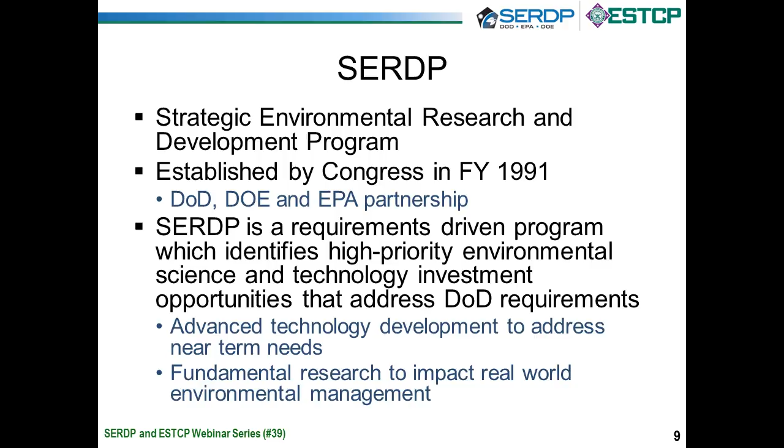Thank you, Mike. I'm very pleased to welcome everyone to today's SERDP and ESTCP webinar. SERDP is the Strategic Environmental Research and Development Program and was established in 1991 by Congress as a partnership between DoD, the Department of Energy, and EPA. SERDP's mission is to identify and address high-priority environmental science and technology opportunities that focus on DoD requirements. SERDP funds both fundamental research as well as advanced technology development that ultimately impacts real-world environmental management.

ESTCP, the Environmental Security Technology Certification Program, was established to demonstrate innovative environmental and energy technologies. These investments capitalize on past investments under SERDP or other research programs and are designed to transition technologies out of the laboratory and into the field. Especially important in all ESTCP demonstrations is the ultimate transition to implementation and regulatory acceptance.

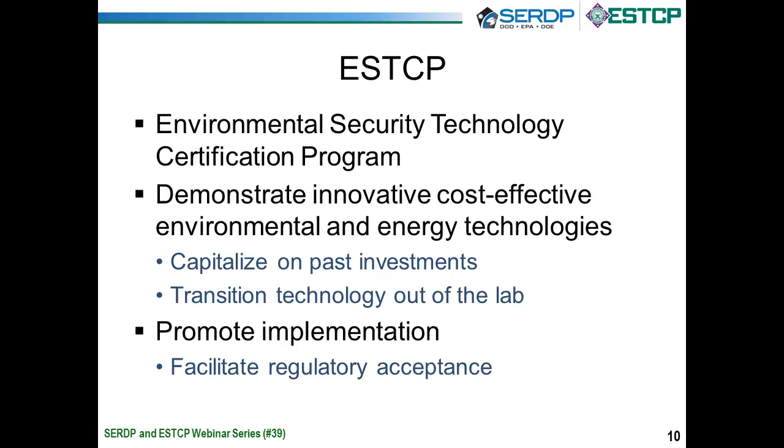SERDP and ESTCP are complementary programs. Much of the SERDP effort occurs at the laboratory and pilot scale, but with occasional field efforts. ESTCP, on the other hand, consists of demonstrations that are primarily at the pilot and field scale, although occasionally there are supporting laboratory efforts that are conducted.

We have 4 program areas in SERDP and 5 program areas in ESTCP. Energy and water is an ESTCP-only program area, while the other 4 - environmental restoration, munitions response, resource conservation and climate change, and weapon systems and platforms - cover both SERDP and ESTCP, and are managed jointly by one designated program manager in each of those 4 program areas.

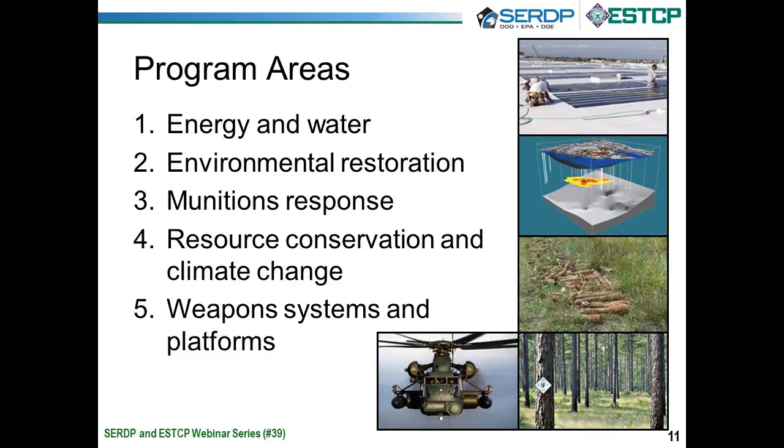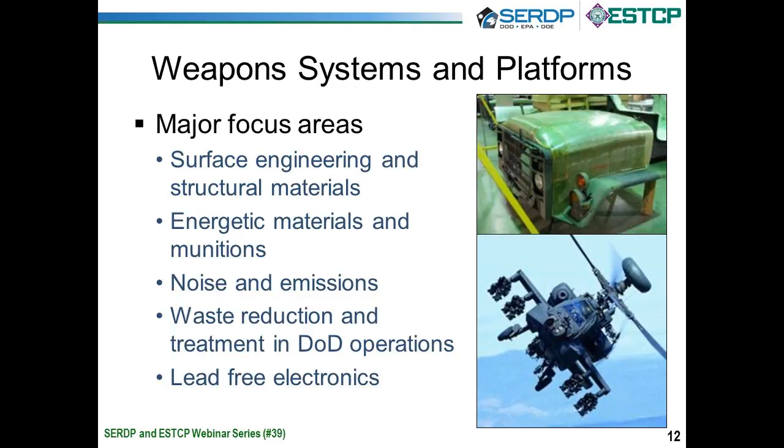Today's webinar is focusing on research and demonstrations that were conducted under the Weapon Systems and Platforms program area. This program area has 5 major focus areas: surface engineering and structural materials, energetic materials and munitions, noise and emissions, waste reduction and treatment in DoD operations, and lead-free electronics. Today's topic is going to cover a little bit of energetic materials and munitions, as well as emissions.

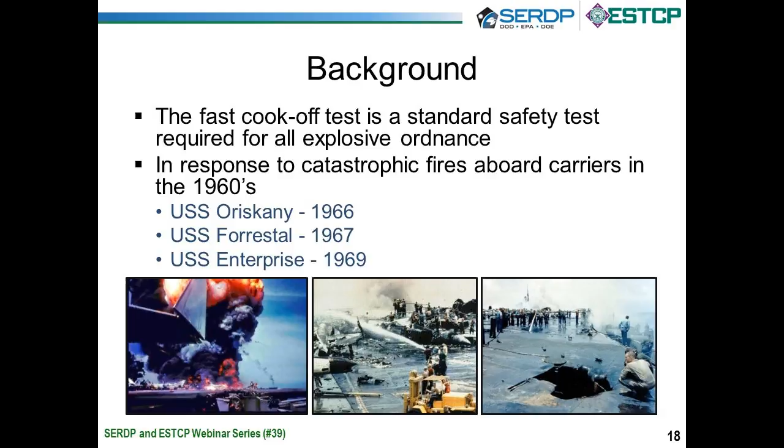The images at the bottom show some of the results from these fires. Notably, the USS Forrestal in 1967 had an incident where 134 U.S. sailors were killed. What happened was you have a bunch of planes getting ready to fly their sorties, loading with explosives, and any fire that starts on the deck results in a bunch of bombs immersed in a large fire. Once one of them cooks off, it's a chain reaction that's hard to stop.

In response to this, the DoD initiated fast cook-off testing, and the purpose is to gradually improve the IM response, the insensitive munition response, to these items, to make them less sensitive to external heating. You want to work towards a situation where the item does not explode at all—it simply burns or does nothing when subjected to these kinds of incidents.

To perform the test, the test item is immersed in a large flame produced by burning liquid hydrocarbon. As shown in the bottom left picture, we have a 105 millimeter howitzer round on a test stand sitting in the fuel basin here at Dahlgren. Once the item's in the basin, the next step is to pump in the fuel required to produce the fire, typically either jet fuel or kerosene.

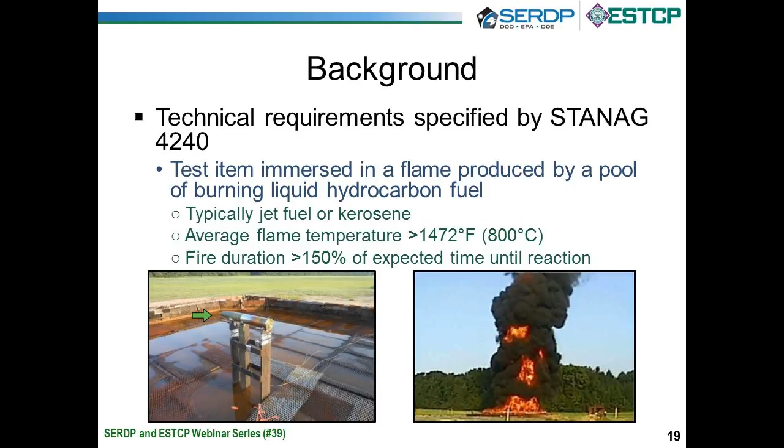You have to pump in enough fuel to produce a fire that burns 150%, or 50% longer, than the expected reaction time. So you have to estimate up front how long you think it'll be before the item reacts, then pump in extra fuel because you don't want to be too short. The other requirement from STANAG 4240 is that the flame temperature measured around the item has to be greater than 800 degrees Celsius for the average duration of the test.

There's been a steady and constant push for an alternative fuel that stems from some of the issues with the current test method. First and foremost are the environmental concerns that stem from this test. Lots of atmospheric emissions are emitted from burning these large pools of hydrocarbon in a very inefficient way.

You also have the public relations problem of the large black clouds of smoke emanating from the test site that really worries people in the vicinity. It's a very visual indication of how bad the test is. And then the very real risk of soil contamination from either spilled or splashed liquid fuel out onto the ground that's then absorbed.

There's also a number of safety and technical risks involved with the test. The fuel is typically transferred to the basin after the energetic item is in place. So now you have workers around this bomb and fuel present all while they're out there.

Another problem is the amount of time it takes to transfer that fuel can be on the order of an hour, and these tests are very weather sensitive. You can't perform them if there's too much wind. So you have to estimate what the wind's going to be an hour from now, and that can cause problems, because once you've started transferring that fuel, you've basically committed to doing a test. So if the wind picks up, you're at risk of having to repeat that test.

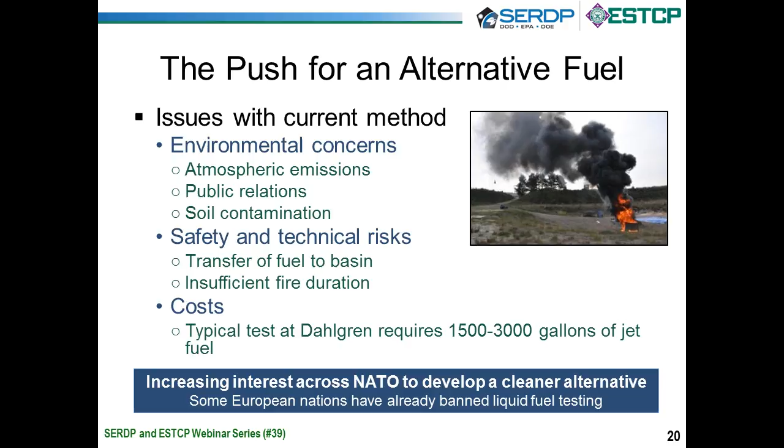Early on in this project, it was noted that propane offered a number of benefits that could address a number of these problems. Starting with the environmental concerns, propane burns much more cleanly than jet fuel or kerosene, so you have much less atmospheric emissions during the test, and virtually no soot cloud. The propane burns very completely, and you can't hardly even tell that there's any smoke emanating from the fire at all. There's also almost no chance of soil contamination because of propane's boiling point of about minus 40 Celsius at atmospheric pressure. Any spilled propane basically just evaporates and wafts away.

From a safety and technical standpoint, one nice thing is you're flowing the fuel through piping to the burner site, so there's never a situation where there's ordnance and fuel at the site at the same time. There's no fuel at the test site until all personnel are in shelter.

Also, the fire duration is only limited by the size of your fuel tank, so in theory you could burn almost indefinitely with a large enough tank. And the other side of that is you can turn the fuel off as soon as your item reacts. So you don't really have to estimate how long the reaction takes, and you save all that fuel. If there's an obvious reaction, you just shut the fire off.

There's no liquid fuel for your components to fall into, and the delay between the go decision and test initiation is virtually eliminated, because as soon as the test engineer says he wants to test, the fire can be ignited. There's also a significant cost savings. Dr. Washburn will go into some of the details, but we typically use about 1/10 as much fuel for a given test compared to the liquid fuel.

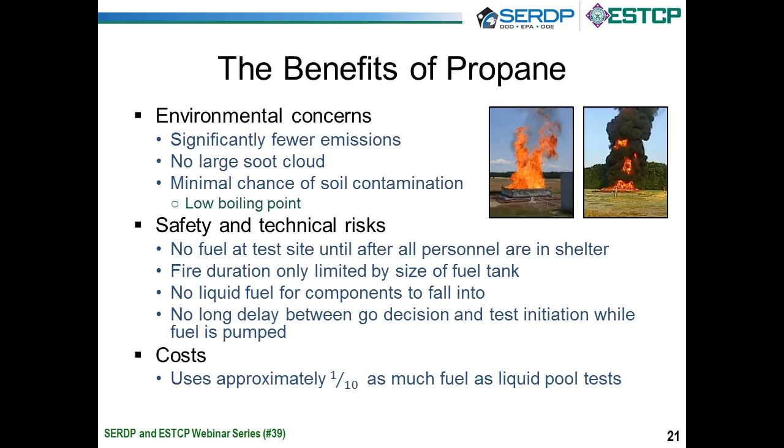So when we started designing a propane burner, there were a number of thermal constraints imparted by the testing standards that we had to meet, and these were condensed down into the following four requirements. The flame temperature must still be greater than 800 degrees Celsius. The average heat flux to the item must be greater than 80 kilowatts per meter squared. The heating should be uniform, and the heating should be approximately 90% radiative. All of these stem from trying to duplicate the heating of a liquid pool fire, which is what the item is most likely to experience during some kind of incident.

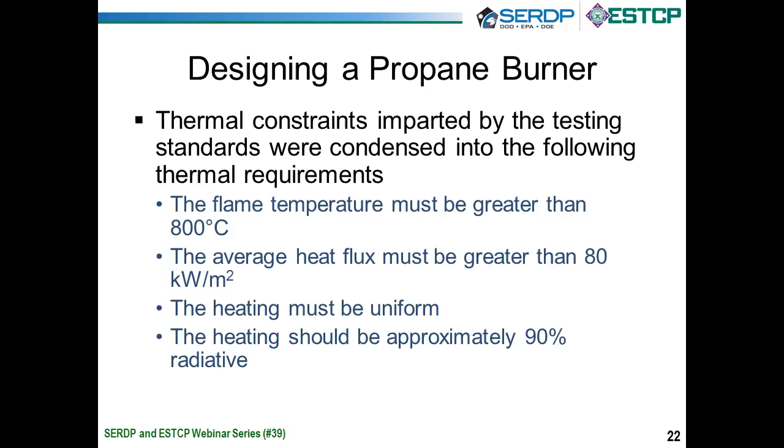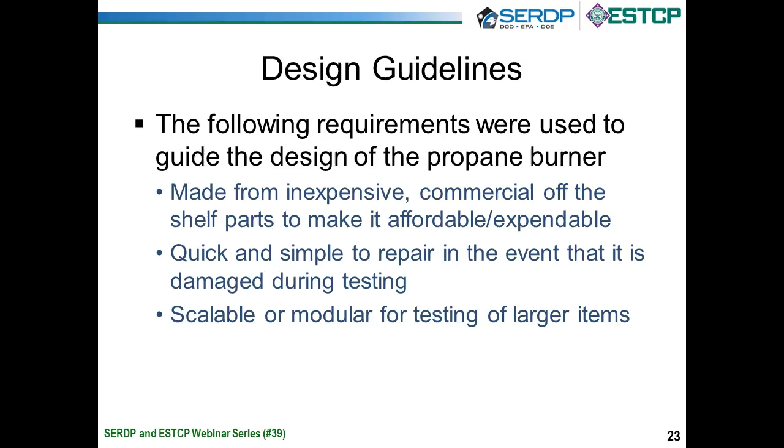Additional guidelines we impose to increase the logistical usefulness of a burner are that it be made from inexpensive, commercially available parts to make it affordable and expendable. If you test long enough, sooner or later you're going to have a high-order reaction that completely destroys your burner, and you don't want to be out a whole lot of money. It should be quick and simple to repair in the event that it's damaged, since some reactions will damage the burner. And it should be scalable or modular for testing large or odd-shaped items.

This slide shows an overview of the burner that we developed. As shown in the right-hand picture, we have a square burner box that's 12 feet on a side, 3.6 meters. Inside of this we have 26 burner tubes, and each burner tube has 26 gas ports in it, for a total of 676 gas ports that evenly distribute the propane gas within this burner.

We also have these side shields. There's only one shown in the picture so that you can see inside of the burner, but typically there'd be a side shield on each side, and these serve to eliminate or reduce the amount of air that is able to get into the burner, which helps us produce the fuel-rich fire like what you see in a liquid pool fire, to more accurately represent the same heating of a liquid pool fire.

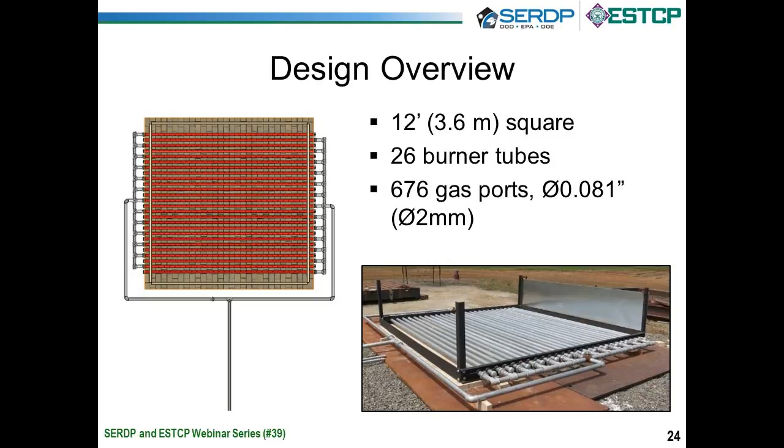Some more details of the burner design. The burner tubes themselves are simply 2-inch Schedule 40 galvanized steel pipe, but we actually flow liquid propane to the burner, and then the radiative feedback from the flame is what boils the propane in the tube. So we have gaseous propane emitting into the burner volume, which burns.

Using liquid propane was sort of key. It has much higher density than gaseous propane, so it was much easier to get the fuel flow rate needed to produce the size and intensity of flames that we required. Also, since we're flowing liquid propane out of the tank, we don't have to worry about a pressure drop. The phase change is occurring within the burner itself instead of within the tank, so we don't have the problem of tanks frosting up and the pressure dropping as they cool down. Essentially what we've done is combined a fuel vaporizer and a burner into one simple unit.

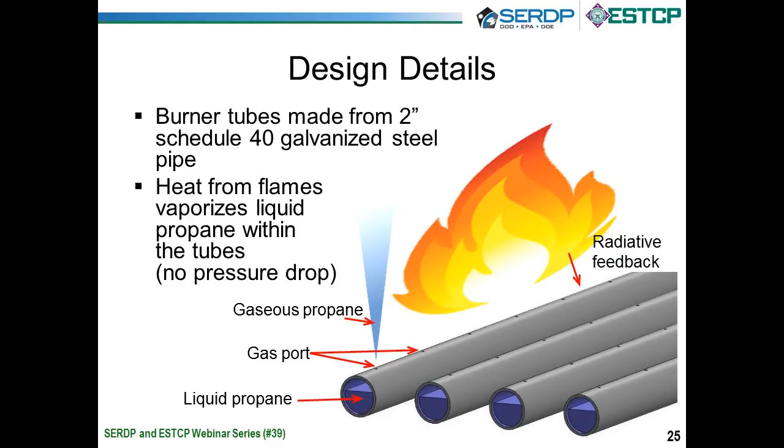Once we had the burner, we had to do a very thorough thermal characterization to determine if it met those thermal requirements that we imposed, or that were imposed by the test standards. First, we had to determine where the temperature requirement within this burner volume is met, and to do that we used an array of thermocouples. I'll show details of that in upcoming slides. We also had to see what volume met the heat flux requirement, since simply meeting the temperature requirement does not necessarily mean that it also meets the heat flux requirement.

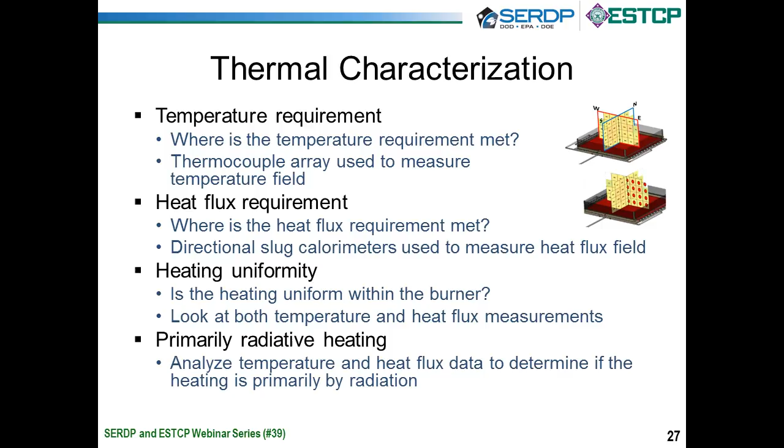The testing overview of the temperatures: we used a cross 8 feet wide, 6 feet tall, placed within the burner, just to determine the region within the burner that meets that 800 degrees Celsius requirement. In the bottom right corner, you can see this cross instrumented with 48 thermocouples placed within the burner. Again, the side shields are missing from this picture so that you can see the grid better, but during the testing, they were present.

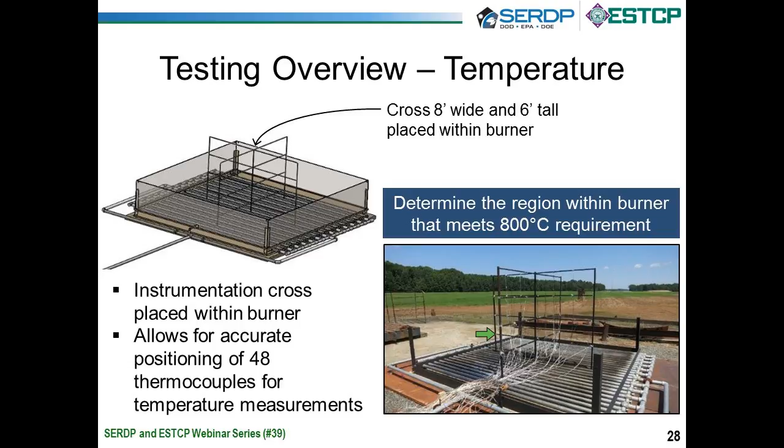Additionally, we looked at the coefficient of variation of the temperatures, which is simply the standard deviation of the temperature field divided by the mean, and this is an indication of uniformity. Our target for that was less than 10%. We got a value of 8%. So what this really means is the temperature is uniform throughout the volume. We don't have some hot spots and cold spots, but it's all more or less the same temperature.

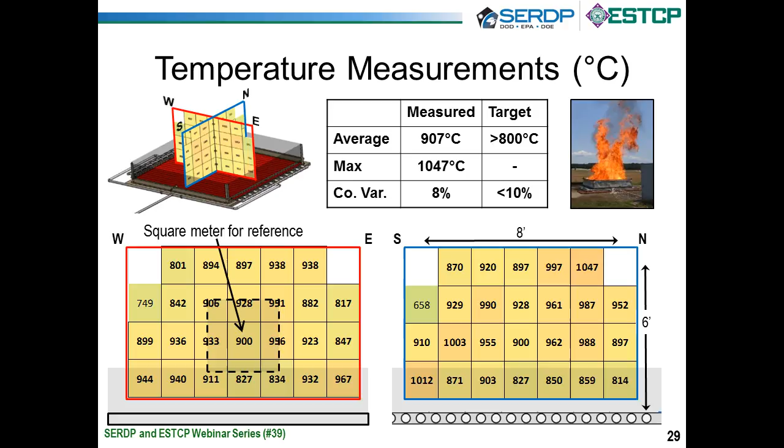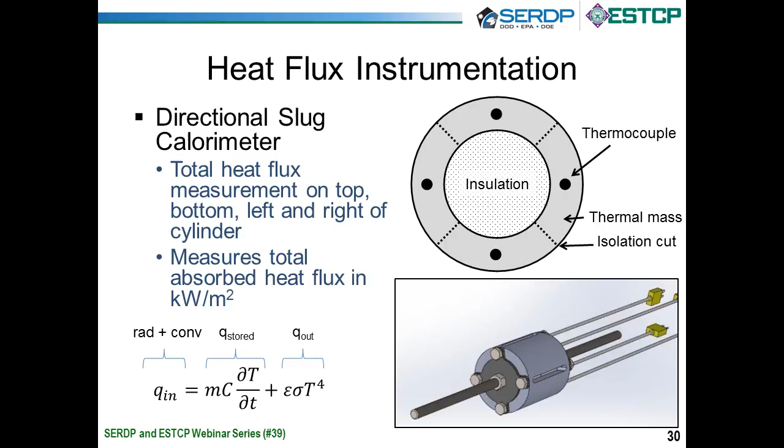Heat flux is a little more difficult than temperature because it's not a thermodynamic property of the material, but rather an energy flux through an area. So to measure that, we had to use a heat flux sensor. We used what we call a directional slug calorimeter, essentially a thick-walled stainless steel hollow cylinder divided into 4 quadrants. By measuring the temperature of those 4 quadrants, we're able to determine the heat flux into each one. This gives us the total heat flux, in units of kilowatts per meter squared, at each location.

Additionally, one other thing we look at is the directional uniformity, which again is the coefficient of variation of those 4 original measurements, the standard deviation divided by the mean. That gives us an idea of how uniform the heating is coming in at this location. A high value implies that all the heating directions are very similar, and a low value would imply that, say, the bottom is getting much more heating than the top, for instance. We wanted a value of at least 75% to show we had good uniformity.

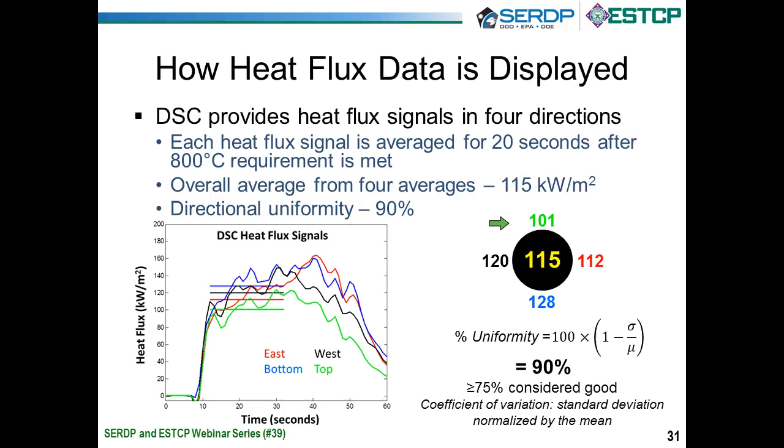The directional slug calorimeters were much more expensive than simple thermocouples, so we couldn't instrument a full volume like we did with the temperature measurements. Instead, we built a stand that held 4 directional slug calorimeters at once, and then moved it around the burner to do multiple tests.

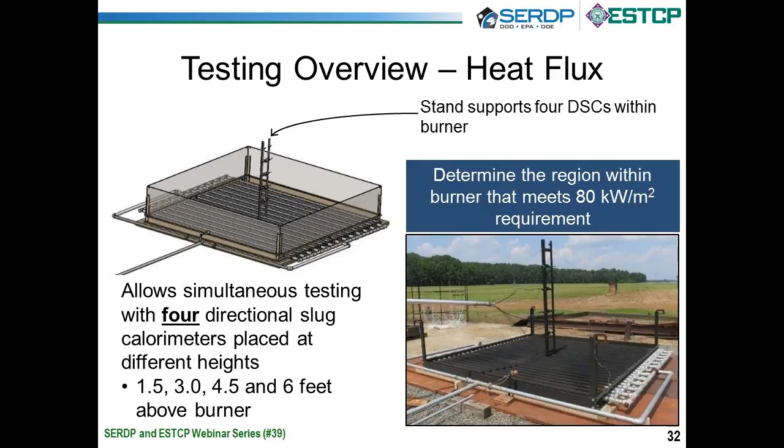We would basically do one rake at a time, and the goal is to determine the region within the burner that meets the 80 kilowatts per meter squared requirement. The heights of the 4 gauges were the same as the thermocouples, so we measured the heat flux at all the same locations that we measured the temperature.

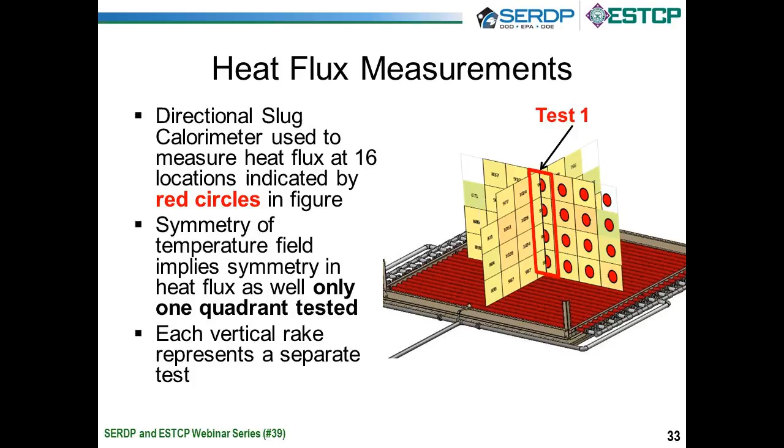Also, the large values of the heat flux relative to the velocity of the gas within the flame imply a high percentage of radiation, because there just isn't enough gas velocity to produce very much convection. So we have pretty high heat flux values. While we can't quantify the percentage, we know that the majority of the heat flux is from radiation in our burner.

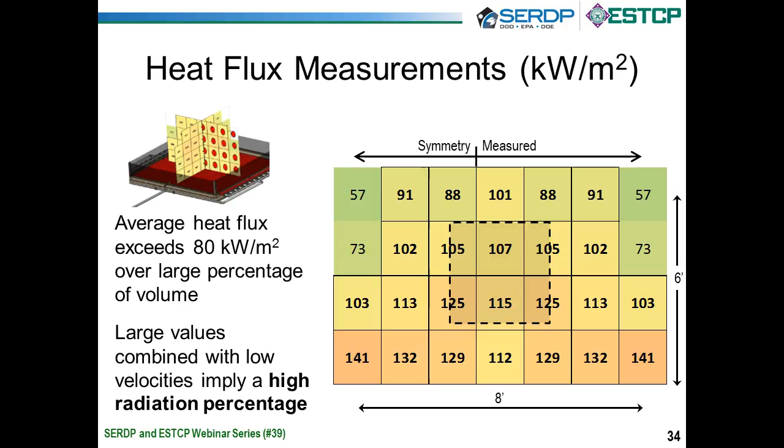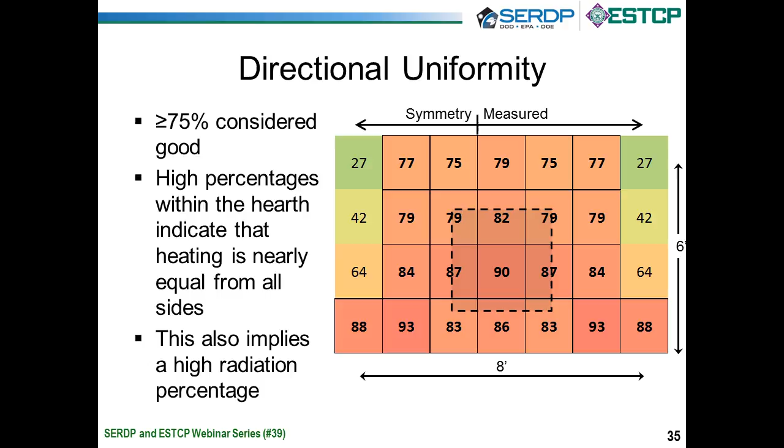This also helps us show that we have a high percentage of radiation, because if it was primarily convective, if we had torches on the bottom, we would expect most of the heating to be on the bottom of the gauge and less heating on the sides and top. So we can't really quantify the percentage of radiation, but we can say we have a majority of heating by radiation.

So a summary of the thermal testing: we have designed a propane burner that meets our thermal requirements. We've shown that we have a large volume greater than 800 degrees Celsius, and a large volume with heat flux greater than 80 kilowatts per meter squared. Most of the region within the burner has uniform heating, both from a heat flux directional uniformity standpoint and a temperature uniformity standpoint. And we think that the majority of the heating does come from radiation.

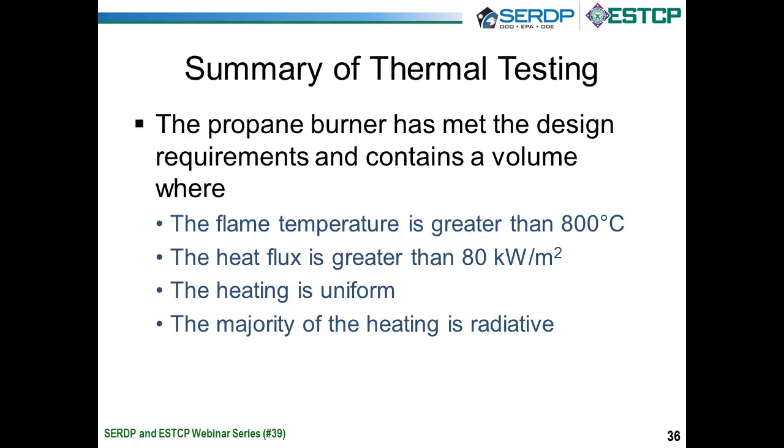So with that, we will start our first Q&A session.

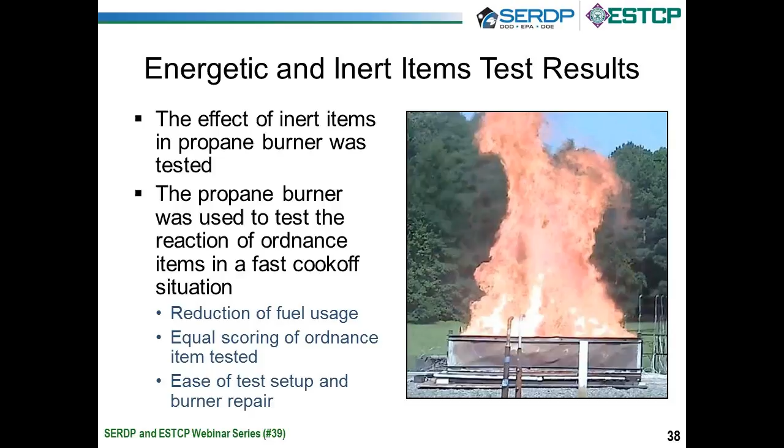We also wanted to do some examples to make sure our assumption is correct, and that's what I'm going to report on here. Once we quantified the burner—the heat temperature, the heat fluxes—we were ready to put some items there and see what happened, comparing them with pool fire. We also did some tests with inert items, just to see what would happen when a large inert item was there.

First is a large aluminum container—500 pounds of aluminum used to house a large munition. It's over 7 feet long, almost 3 feet high, and was the largest thing we've ever tested in a 12-foot by 12-foot burner. Some of what we wanted to see is what would happen if we put something that large in a burner—how would it affect the flame? And also, knowing that the aluminum should melt, what's going to happen when we have large inert items flowing over the pipes and maybe preventing the burner from working?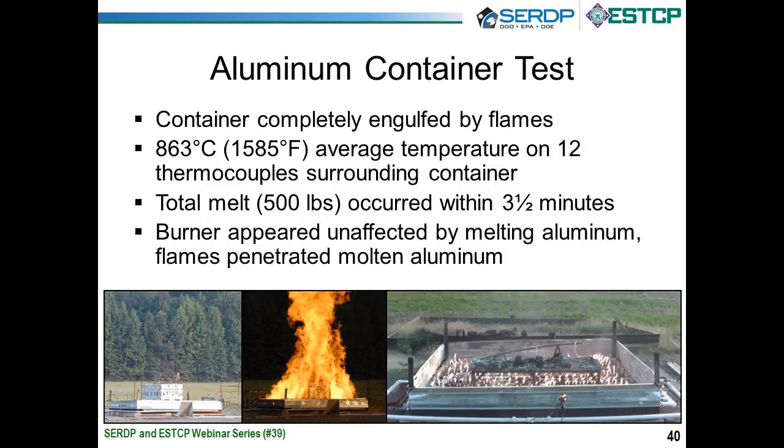We don't have a picture here, but you can see the item in that center picture before it melted, soon after it melted, and the flames went on just fine. Even after it melted, when our little candles came out of the pipes, they were able to penetrate the molten aluminum. We also put sand on the bottom of the burner, which led to pretty quick cleanup and we could use it right away.

Moving on to actual munitions, ordnance items, we started with some 81 millimeter mortars. We found a mortar that had two explosive fills. The first one I'm going to report on is the insensitive fill. It had IMX 104, which was specifically made to have a low reaction for fast cook-off testing.

They rate how an item reacts on a scale from 1, which would be a detonation, a catastrophic event, to a 5, where it will burn but stays where it's at, sending nothing outside the pool or burner itself. This IMX 104 is slated to have a Type 5 reaction.

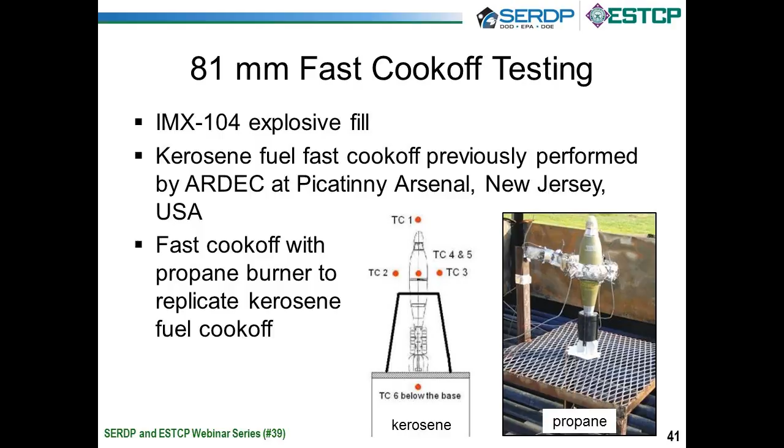It was previously tested by the Army in New Jersey at Picatinny Arsenal in a kerosene pool fire, which made it convenient for comparing our results with the propane burner. We wanted to replicate what happened in the kerosene pool fire with the propane. On the left you can see the schematic from the kerosene test setup, and on the right our test setup photo.

The results of both the kerosene and propane tests was that it had a Type 5 reaction, basically burning within the area itself, the pool fire or the propane burner.

As Dr. Hubbell was talking about, there's a large reduction in fuel usage. The kerosene test used almost 3,800 liters of kerosene, where we used about 570 liters of propane. That's a significant savings in cost. You might buy propane for $3, same with kerosene, but sometimes there's additional cost for kerosene, depending on supply chain, which can be up to $6 a gallon.

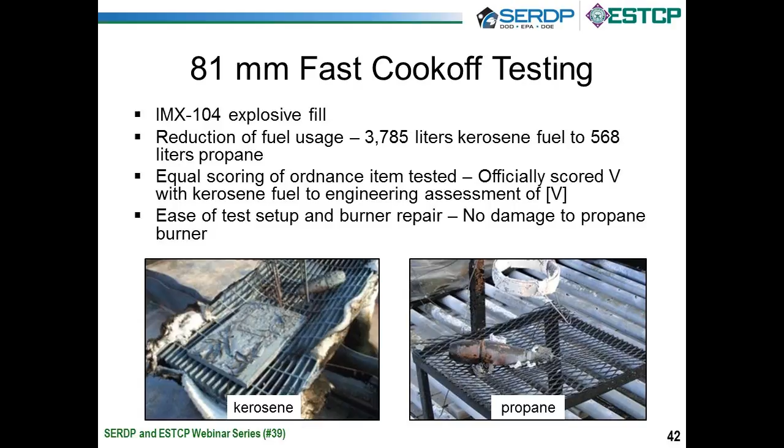So, the propane burner test: the item did not have a vigorous reaction. However, we didn't really have to do anything. You can see it kind of coated the pipes - in the right picture you can see the pipes are kind of white coated. We just tested again after that, and it didn't have any problems.

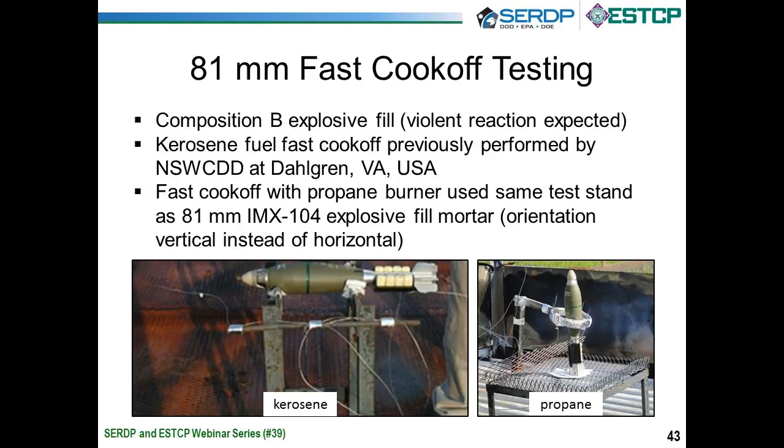As I stated, the same mortar item that had the IMX 104 explosive fill also had composition B explosive fill, which was expected to have a violent reaction. We wanted to compare with kerosene data that had been tested previously at Dahlgren, though in a slightly different orientation. The kerosene pool fire had been in a horizontal orientation, whereas we had vertical, and the reason we kept vertical is we wanted the same test setup as the IMX 104 explosive fill testing.

The result of the testing was that both had a violent reaction. It was not a detonation, but there was definitely an explosion. There was shrapnel, or fragments, that went out and damaged the pipes, but once again we used significantly less fuel. There were 3 pipes damaged, but it took less than an hour to unscrew them and put in new pipes.

A key thing here is that we used significantly less fuel in the composition B explosive fill testing than with the IMX 104 explosive fill testing. The reason is because the composition B had a much more vigorous reaction. We knew when it happened, so we had a much better idea of doing that 50% past reaction. It's one of the advantages of propane - you can shut it off. So if a test goes quickly, you can go past the 50% mark and finish out the test using less fuel.

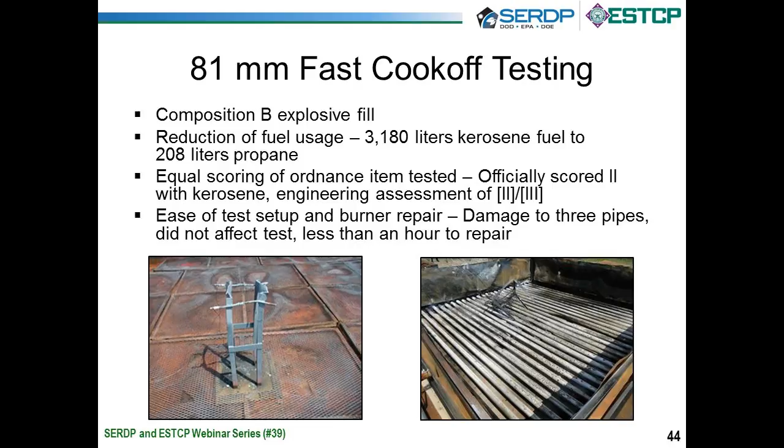So here is a video that shows the test with IMX versus composition B.

I don't know if it started yet - it's playing on my screen. Oh, is it? Okay good, there it goes. Now it goes on mine. Good.

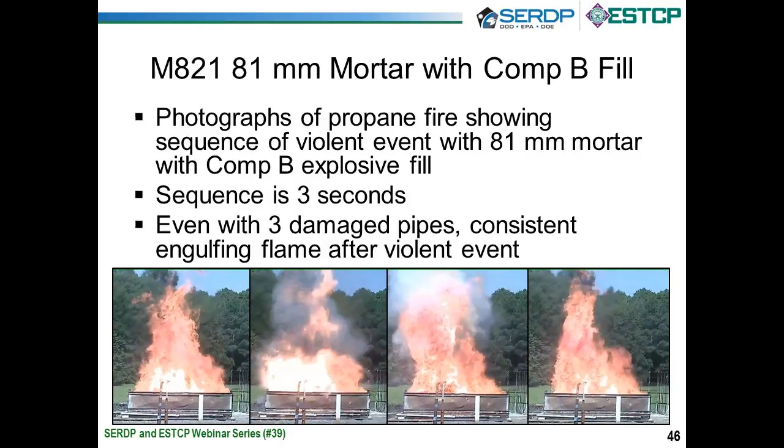As I talked about, one of the advantages of propane is its ability to have a very consistent and quick ignition process.

Below you see this was a further test for another item, and we tested both in the fuel fire and also in the propane burner, at 2 seconds, 10 seconds, 20 seconds, and 40 seconds after the ignition event. Propane fire had a consistent fire almost immediately, as opposed to the pool fire, which is kind of a gradual ignition process. Once again, this is really just qualitative.

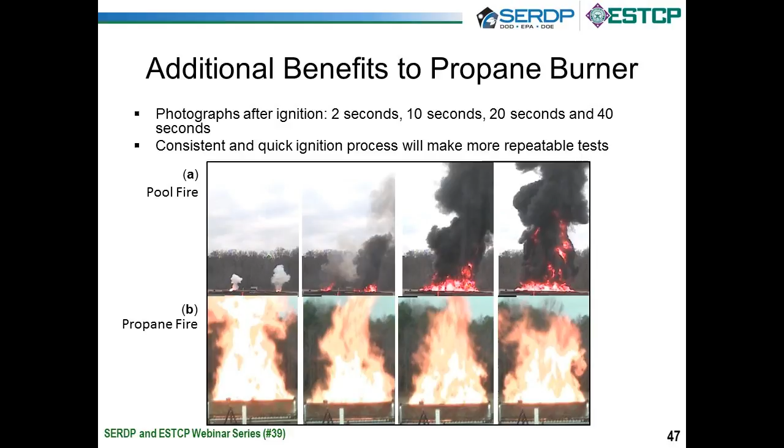You can just see the difference in the environmental emissions there. That pool fire on the top right has that huge cloud of black smoke. Down below we have our nice radiant orange fire, which is very radiative, but it doesn't have the inefficient soot coming out of it.

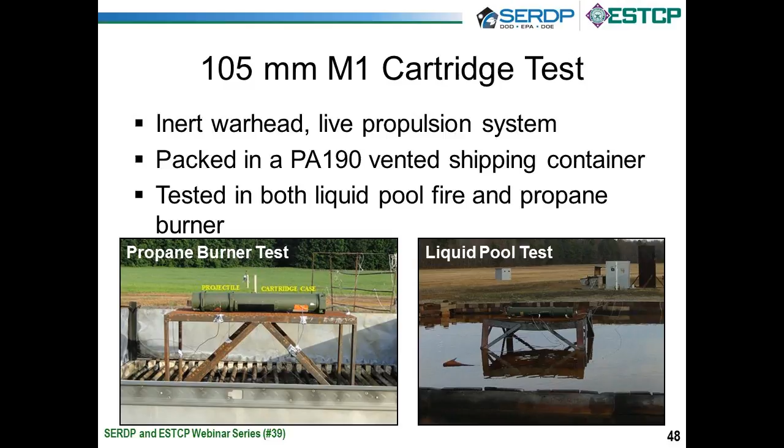Here I'd like to quantify some more, or show some more explosive ordnance tests that we performed. We performed a test on a 105 millimeter artillery cartridge, M1 cartridge. It had an inert warhead but a live propulsion system, packed in the shipping container. With this one we tested both propane and liquid pool fire.

The results for the liquid pool fire test varied depending on when the test was taken. This happens in fast cook-off testing with large, buoyant, turbulent flame heat conditions. There are some differences in reactions, even within the pool fire itself.

However, you can see with the propane burner, when we had a similar type of heat environment and flame temperature, we had similar reaction times and reaction assessment.

It's important to realize that if you just take one fast cook-off test in kerosene and one test in propane, they should be similar. They won't necessarily have the exact same reaction, but that's just because you'd get the same variance in a pool fire itself.

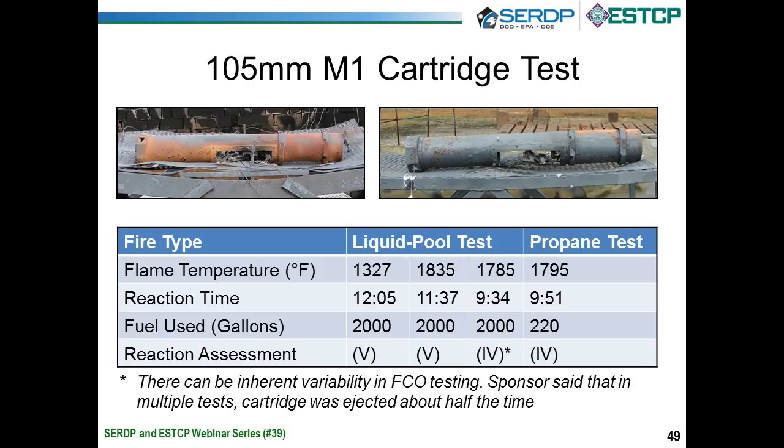Here we were fortunately able to have multiple reactions within the pool fire, and they had the same reaction with the propane burner.

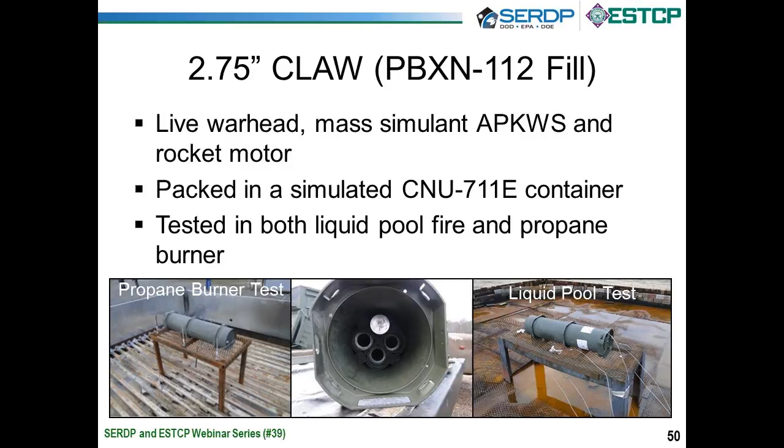Here is another 2.75 warhead. It was also tested within a container, in both the liquid pool fire and the propane burner. Once again, we have the same reaction assessment but different reaction times, which is similar to what you get in a pool fire.

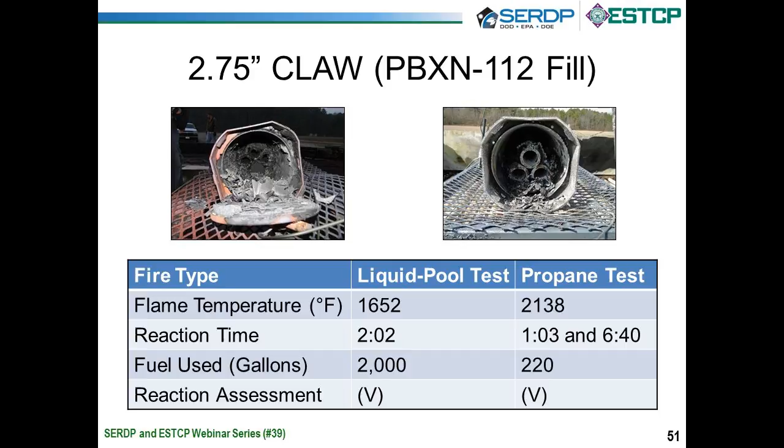Reaction time isn't something that's required to be consistent. However, the most important thing is the reaction assessment was the same between both of them. And once again, we used significantly less fuel, almost a tenth of the fuel we used for the propane burner.

This one here is a light anti-armor weapon, and we didn't necessarily have a direct comparison with the fuel fire test because the item tested in the fuel fire had a live warhead, and ours had an inert warhead. The reaction time shown is the reaction of what we assume was the propulsion part of the weapon, and the initial reaction was similar.

The overall reaction was different in the sense that one had a warhead and the other didn't, but the time for the propulsion side and its reaction were the same as far as that goes.

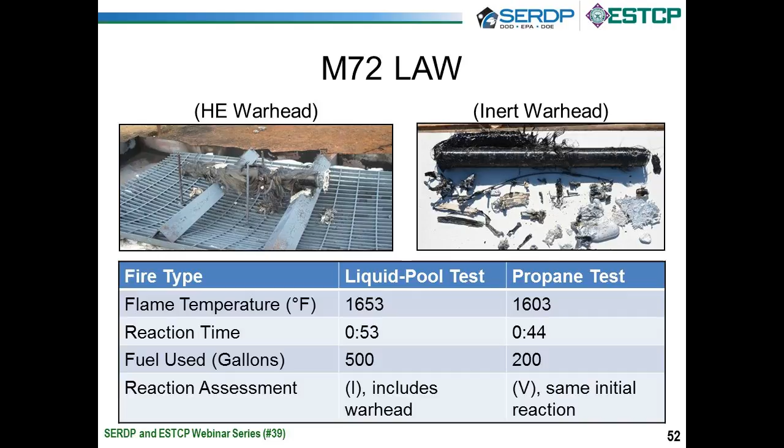So here is a summary of the testing we've done up to date. We're going to do larger items. This is what we've completed at this point.

The key thing here is that we get pretty much the same reaction in the propane burner as we do in the liquid fuel fire test. So you can use past results for your weapons and ordnance items, and compare them with present results in the ordnance propane burner.

One of the requirements for munitions is that they improve their IM signature, their insensitive munitions signature, and so they need to be able to base current results against past results to show that improvement. You can do that with the propane burner.

Another key thing here is we have the same temperatures. Average flame temperatures are very similar, in the same ballpark as you would see in a liquid pool fire.

As far as money savings and emissions reductions, our fuel reduction is significant, up to 90%. We need only 10% of the fuel.

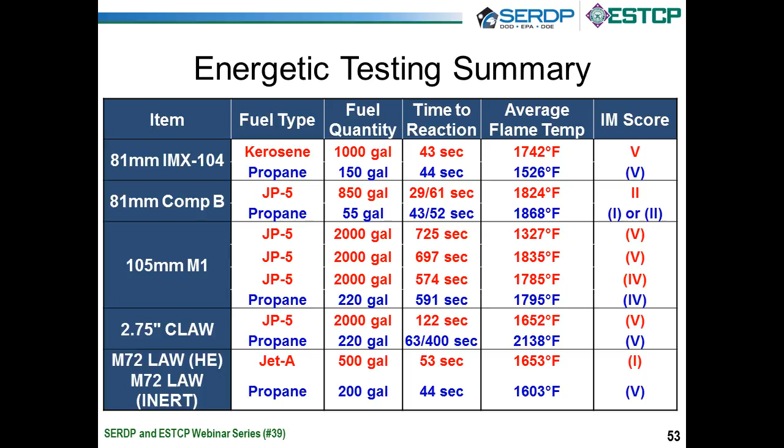As far as testing larger items, one thing we're doing is we built a 10-foot by 20-foot burner. This was built at a different site so it can be transferred to a different location. It was actually built in the same area where they do jet fuel fast cook-off testing.

As you can see that dirt berm, that's where they would put the liner down and pour the fuel in to do the actual jet fuel pool fire testing. We can remove all the burner apparatus you see there very quickly, I think it takes about 15 minutes with forklifts, and the firing system is set up so we could do either testing depending on where we go with that.

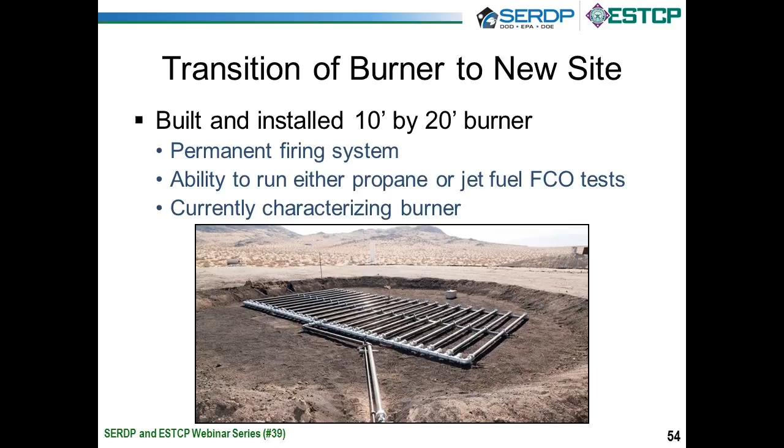We are currently characterizing that burner. I'll be presenting those results at the 2016 Insensitive Munitions Energetic Material Technology Symposium in Nashville next month, and Dr. Aurell and Dr. Gullett at the EPA did some testing with the emissions, and they're going to be reporting that at the symposium as well. But if we go to the next slide, we can see some results.

Right now, we've tested an 8-foot by 8-foot burner, a 12-foot by 12-foot burner, and a 10-foot by 20-foot burner. We're currently also building a 15-foot by 20-foot burner at China Lake to scale it up even more. With each of these burners, we've been able to get that consistent, radiant, buoyant flame that you need in order to have a valid test.

Part of this process is we're looking to transition this burner to other sites and be able to have other people use this as far as their testing goes.

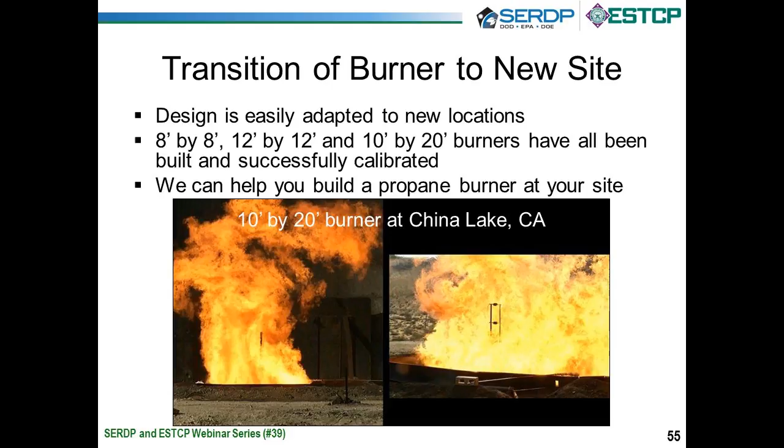As far as standardization, Dr. Hubble talked about this. In the United States, the U.S. Joint Services Insensitive Munitions Technical Panel, which has technology oversight over insensitive munitions for the Department of Defense, has unanimously endorsed this overall effort. They are currently working with us to support this through both OSD and the JROC, the Joint Requirements Oversight Council, to make this approved for U.S. use for scoring within this next fiscal year.

Also, we're working with STANAG 4240, rewriting the AOP 4240 that would allow propane burners. This is going through the approval process, and we're hoping that soon that will be approved as well. We've also submitted a patent on this technology, which is currently going through its process as well.

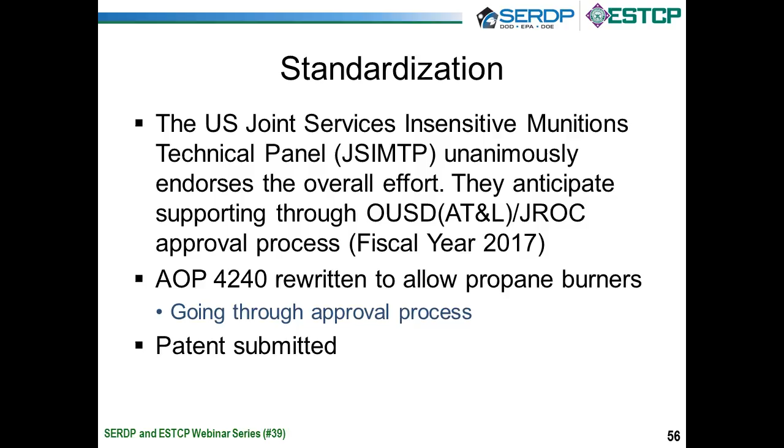As far as conclusions, as I emphasized at the very beginning, there's no way we can test every single munitions item. So what we've done is show that the fire is the same in a pool fire and in this propane burner. Therefore, we can put in different items and you're going to get the same reaction.

Up to this point, we've done a small number of items that we've been able to receive, and also had pool fire data that we compare against, and in the items we've tested so far, they've had the same reaction as they did in the jet pool fire.

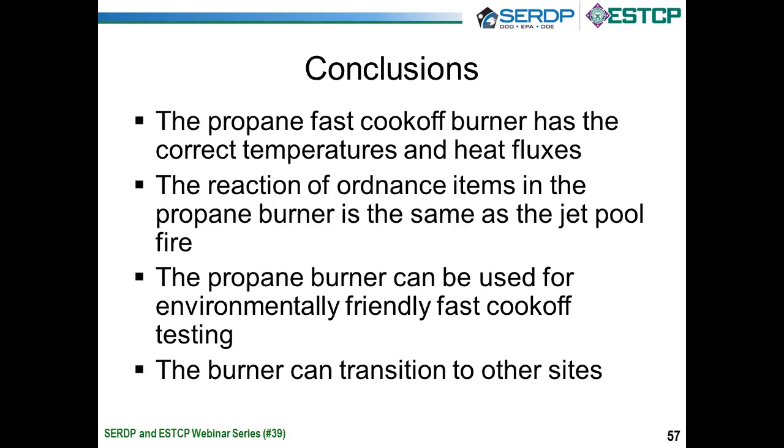So this propane burner really is an environmental alternative for fast cook-off testing, and we've already transitioned it to 2 sites, 2 different types of firing lines, 2 different types of setups, going from a wooded area to a desert area, different locations, and both have been successful in transitioning to those sites. So I think that's the end of where I'm at right there, and we're going on to the next question.